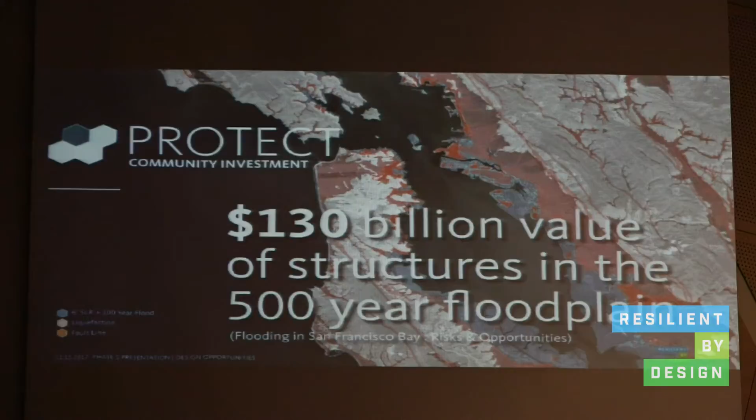So what does it really mean to design a lasting future for the Bay Area? We already know there's $130 billion of value of structures in the floodplain. How do we protect for that? There's 30% growth happening between 2010 and 2040 in the Bay Area. How do we think about the growth aspect?

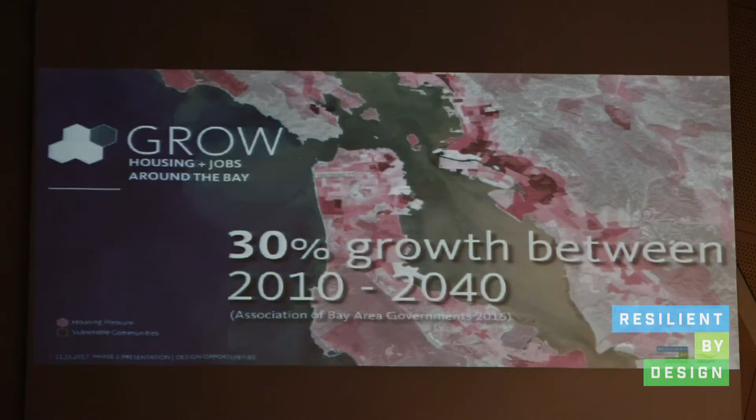When we think about trans-Bay corridors, studies suggest there's 152% capacity in 2040. How do we think about moving goods and people? And then there's really only 20% of the Bay shoreline that's accessible. How do we engage that?

Each of these systems doesn't run independently, and when we think about resilience, we want to make sure we think about all these four things together.

Given the complexity and gravity of this challenge, our team approached the research phase eager to listen and learn from the regional experts, the resilience experts, and the community leaders to find out what they had to teach us about resilience.

Looking back at the last 10 weeks or so of our process, it wasn't surprising to realize that our most vital insights came from walking through neighborhoods and talking with community leaders, really being led by those who have dedicated their lives and careers to protecting communities in the Bay Area.

Besides our external outreach effort, our team also leaned heavily on our subject matter experts to conduct qualitative and quantitative research, synthesizing a wealth of information into design workshops we conducted internally as a team. Together, our external outreach and internal workshops gave us the insights we built on for the design concepts that Ricky and Cecil will be talking about in a few minutes.

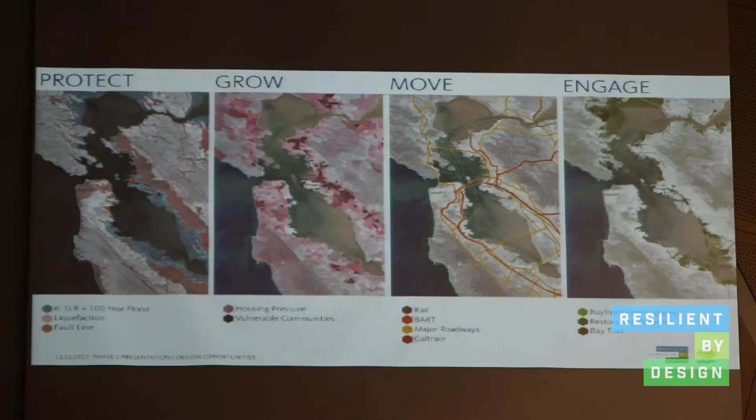Looking at all of the sites and all of the factors we took into account, from flooding to housing to mobility to ecology, we came back to 2 sites in particular, West Oakland and East Palo Alto, that really spoke to our team and presented the greatest opportunities for high-level regional impacts from very localized interventions. From this research, we were also able to tentatively identify our intervention area and begin designing the concepts that Ricky and Cecil will be walking through.

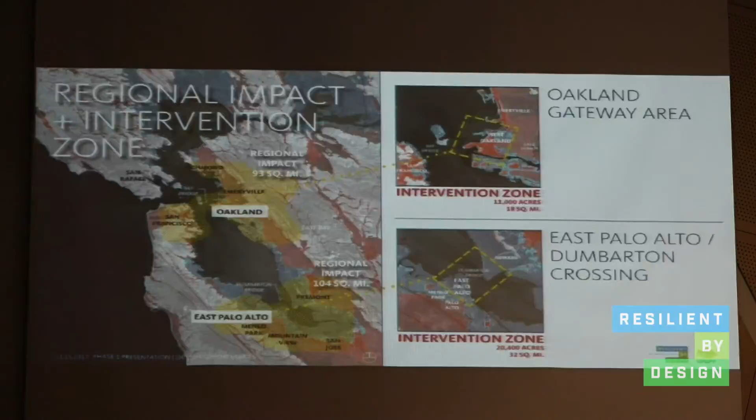So the first site we're going to be talking about is the Oakland Gateway area. What's really interesting about this area is it's very rich in many ways, with all this infrastructure - it's a real 3-dimensional equation and solution where there's so many different factors that come together.

One of the most important things about it is that Oakland already has this kind of vibrant character, its color, its richness to it. So making sure that we actually understand what that is and work with that as a basic framework is really important.

But again, with that, how do we create new experiences on top of that? And how do we connect these experiences together? And how do we work with the community to really figure that out?

So when we're balancing opportunities here, it's really about thinking about environmental justice, gentrification, and displacement in many cases. Can we actually build something adjacent to, for example, West Oakland, to increase opportunity, but also create something that benefits the community adjacent to it as well? And is there a way to manage displacement with that?

And then is there a way of really thinking about how do we address the risk of sea level rise and flooding in so many different ways and different typologies?

So in terms of the constraints, again, sea level rise, we need to figure out what we do. There's actually 2 vulnerabilities in that area. What do we do with the East Bay MUD and the wastewater treatment plant? And how do we think about some of the investments that are actually in the liquefaction zones?

We're thinking about growing the community because of growth. If we think about displacement, affordability of housing, gentrification, what do we do with that? Are there ways of preparing for this 30% rise in jobs and housing needs?

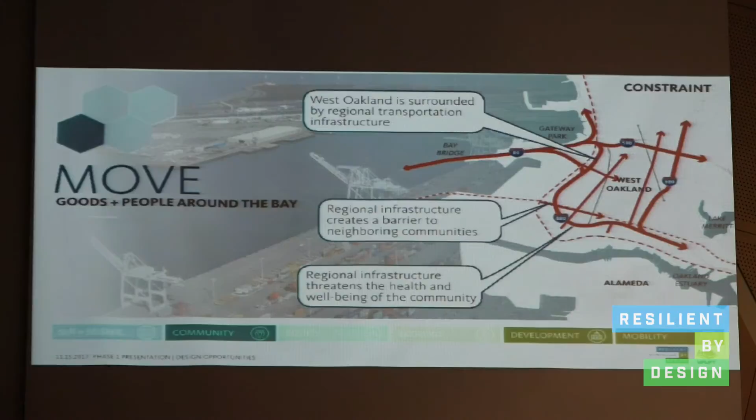And again, with mobility and infrastructure, are there ways of thinking about it from a health and wellness perspective? And if we want to engage, how do you actually get a community to connect back to the bay? We have an operating port, there's all this rail infrastructure, but what are the ways that we do that?

And then sometimes, in many cases, here with Oakland and Alameda, the estuary kind of divides up those communities. So how can we connect those things together?

So the first design opportunity and concept that we talk about is bridging communities through uplift. The first thing we do is protect the edges, Gateway Park, also down on the southern side where the estuary is. In terms of growing, there's opportunities of creating and utilizing the underutilized rail areas to be able to create a deck and a community above that.

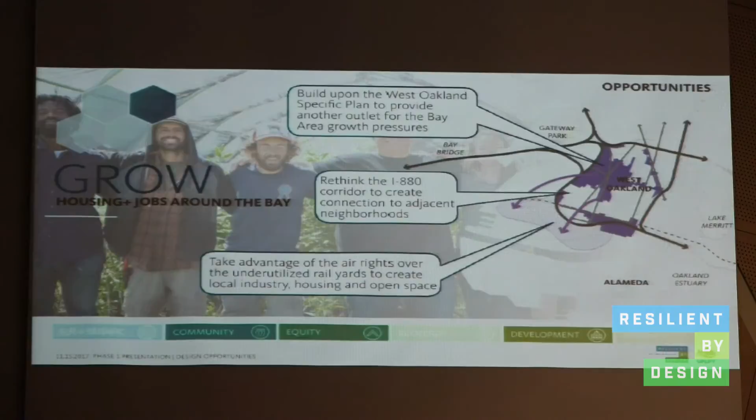There's also opportunities to ease some of that growth pressure as well.

In terms of moving, can we actually rethink the I-880 corridor and see what we can do with that? Can we also reorganize some of the port logistics? Remember, all the pollution, the air pollution, all of those things are coming from there - how do we mitigate some of that so there's some advantages for the community?

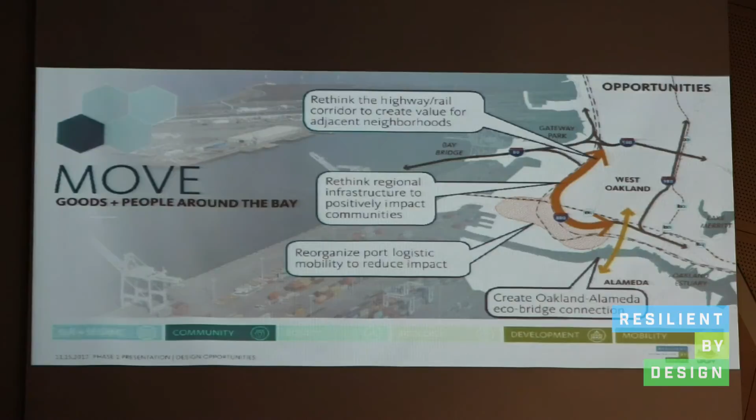And then is there a way to create this kind of eco-connection between Alameda and Oakland? In terms of engaging, if we create this new deck above the railway, is there a way of creating this new connection, bringing green and water closer to West Oakland, but also being able to get closer to the water from West Oakland as well? And then is there a way of creating that connection to Oakland?

So the strategies here are kind of a synthesis in terms of our concepts of what we're thinking of doing.

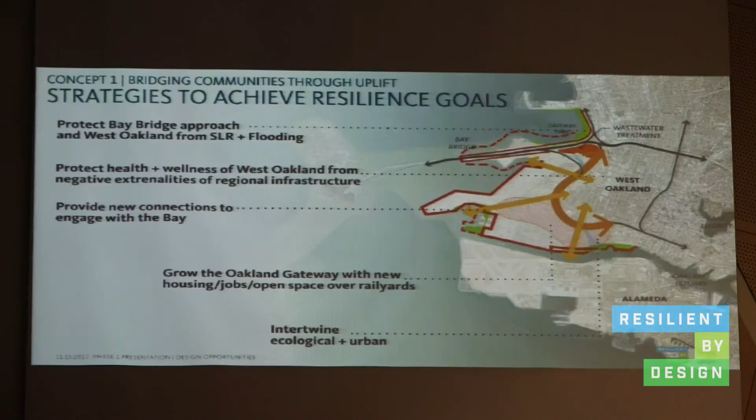It's really, again, thinking about how do we intertwine the ecological and urban conditions, so it's not isolated, but how do we use that to our advantage? We do that in order to be able to protect, grow, engage, and move people.

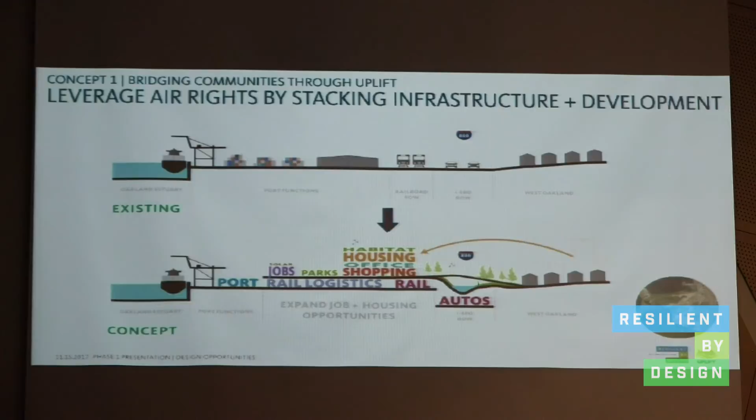So this is thinking about things three-dimensionally. You see the existing condition at the top, and a section at the bottom. The section shows how you can have a dialogue between West Oakland and this new community in terms of new opportunities for managed development. You can see the rail logistics below, and new opportunities for habitat, job growth, and new parks as well.

This is a conceptual image of what we want to say. We want to really connect some of these communities to the Bay, but really thinking about the operational aspects. The port needs to operate, but through clever ways of using design and working with the community, we'll be able to make these connections that allow for new opportunities: new jobs, new housing, farmers market, opportunities for sports, constructed wetlands — really speaking to the culture and diversity of this new place.

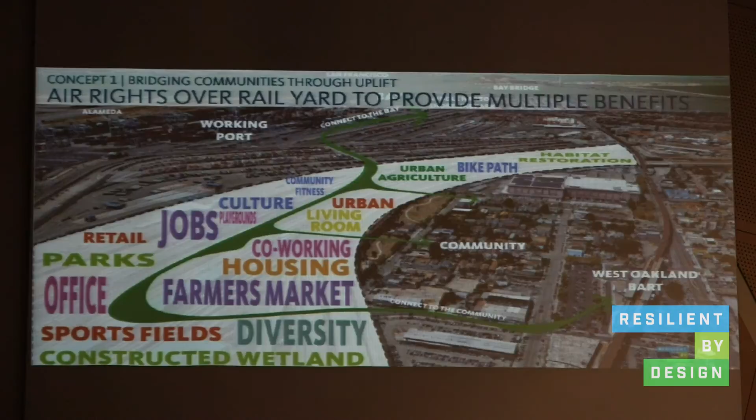We found the challenges and opportunities in this area so compelling and complex that we developed another concept for it, using some of the moves shown in our previous concept, but really shifting our focus towards bringing water in and using it to connect communities from Gateway Park to Alameda.

Our concept reimagines the regional infrastructure, which has disproportionately negatively impacted West Oakland, and in particular the wastewater treatment plant, which will become increasingly vulnerable with sea level rise, more severe rain events, and increasing populations.

While sea level rise protection will happen primarily along the shoreline with both hard and soft protective infrastructure, we saw an opportunity to use the 880 right-of-way to address current and impending issues by transforming the spaces under and adjacent to the highway with a green, spongy corridor. We can treat wastewater with wetlands, provide habitat and open space, provide a green buffer for highway air pollution, provide land that acts as a sponge during flooding events, and create a new and protected bay trail.

The corridor would link Gateway Park through West Oakland and down to Alameda, where we're proposing a new bridge to connect West Alameda to Oakland, providing a critical missing link. The right-of-way actually closely aligns with the historic shoreline, and by transforming this land, we're reconnecting two parts of the bay that were historically tied together.

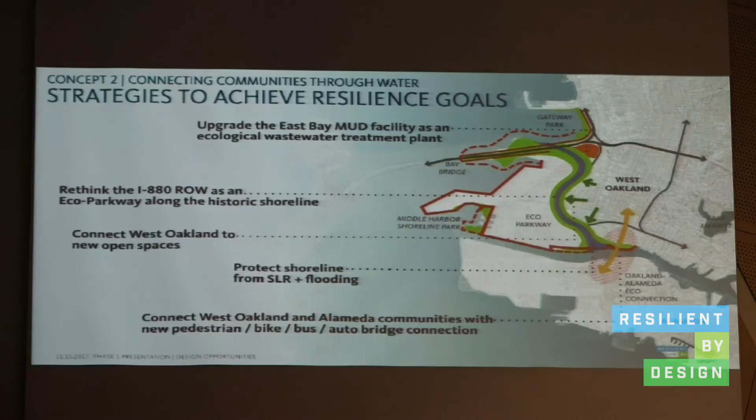In an area so cut off from the bay, we think it's critical to provide more ways and spaces of engaging with the bay, and to use water as cultural placemaking — understanding that resiliency is not just about flood protection, but also about creating social cohesion. This likens to cities with canal networks. The canals were often built to control for flooding, but over time have become iconic elements of the city, and we see that creating a sense of place strengthens community.

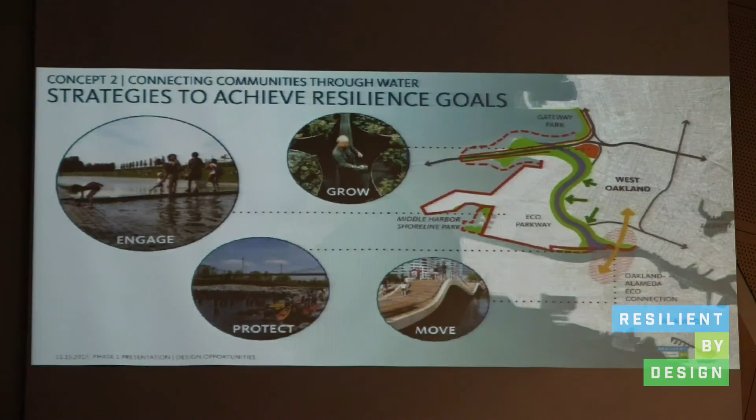At the southern end of our site, the Oakland estuary currently forms a barrier between Oakland and Alameda. By bridging the estuary, we can connect communities, activate both sides of the estuary, and provide more access to the water and an evacuation route during disasters. By reconfiguring the existing transportation arteries, including undergrounding the rail, we can create space for development, improve air quality, and reduce neighborhood traffic.

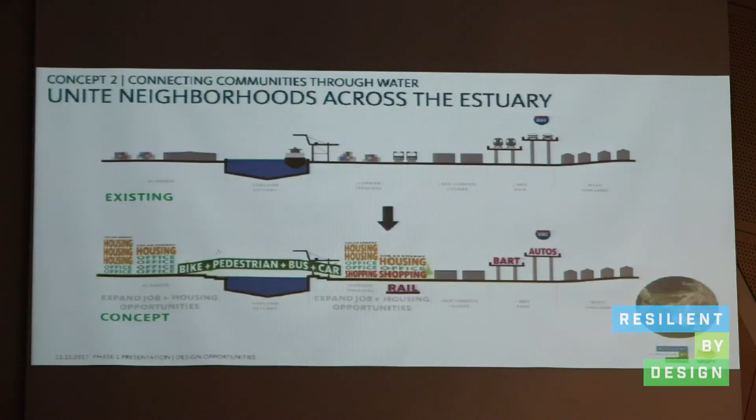Further north towards the Bay Bridge, existing conditions show the breadth of land devoted to the rail and 880 corridor. Our concept transforms this land into a blue-green corridor, and while we likely won't be able to absorb all 63 million gallons of water currently treated by the wastewater plant daily, a series of constructed wetlands within the corridor could treat some of that wastewater, allowing for infiltration and improved water quality discharge to the bay.

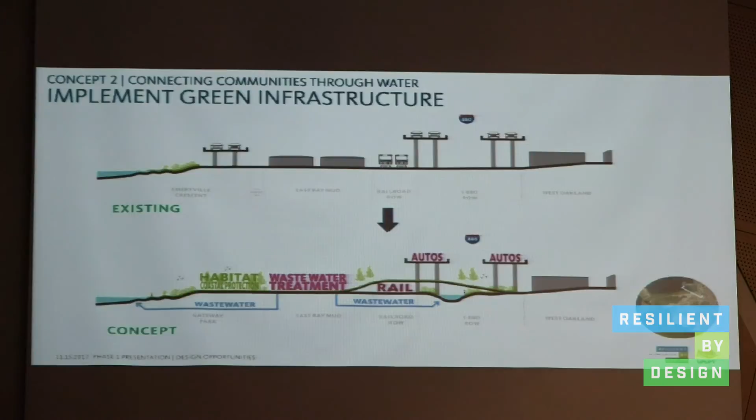We also see that those wetlands could act as habitat, providing a missing link between the Emeryville Crescent Marsh and down to the Oakland Estuary and San Leandro Marsh. Adjacent uses could include recreation areas and other floodable programs so that during storm events, there's more land to absorb water.

The anchor of our blue-green corridor is the bridge to Alameda, which will integrate mixed-use development so that people can work where they live, enhance the park system and transportation network through dedicated bus lanes, bike lanes, and open space, reduce traffic and commute times by providing a more direct route to the East Bay, and most importantly, connect two communities, creating a stronger, more resilient Oakland and Alameda.

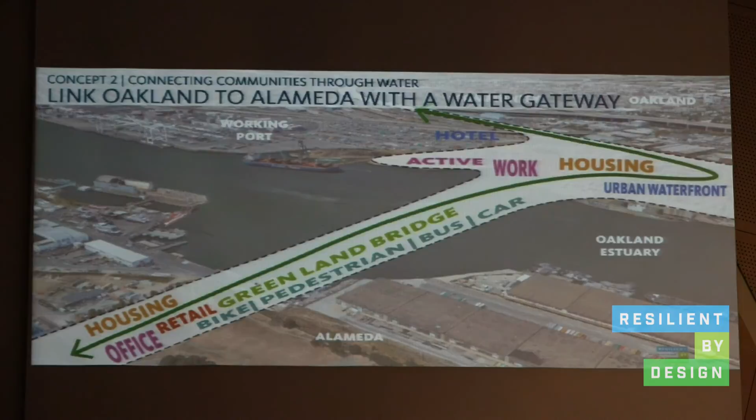So the third site that we're going to be talking about is the East Palo Alto and the Dumbarton Bridge crossing area. There's really some complicated regulatory aspects down there. In terms of growth, we need to think about how cities evolve in the future, so we're looking more long-term, the 2050 aspects.

East Palo Alto has amazing character and richness, so how do we keep that as a foundation while introducing new experiences? It's about how do you actually build on the bay and still maintain some of that ecological aspect, doing an intervention that may not have much impact on the bay but will improve other aspects. We need to protect some of the edges.

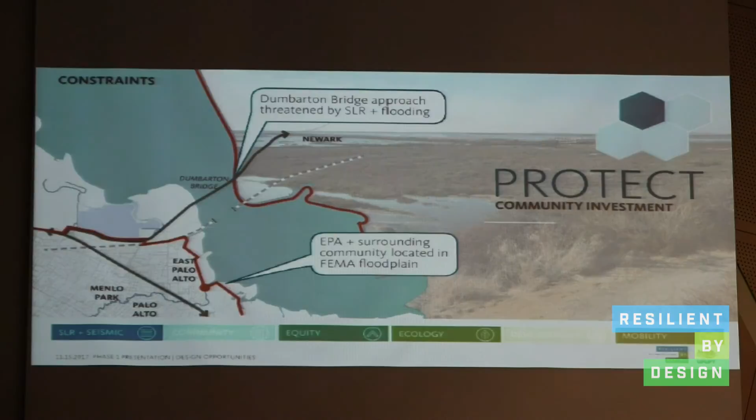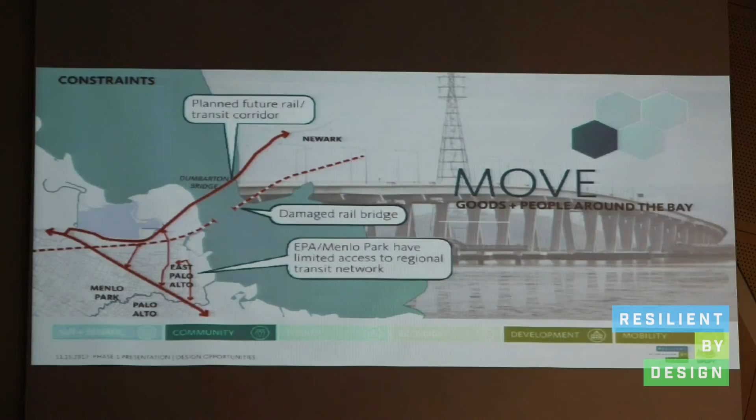Thinking about growth in those three communities, East Palo Alto and Menlo Park, think about affordability. How do we move the Dumbarton Bridge itself and the rail corridor, and begin to connect those things together? How do we engage with the water so that it actually becomes a destination as well? So the third one we call habitat opportunities above and below.

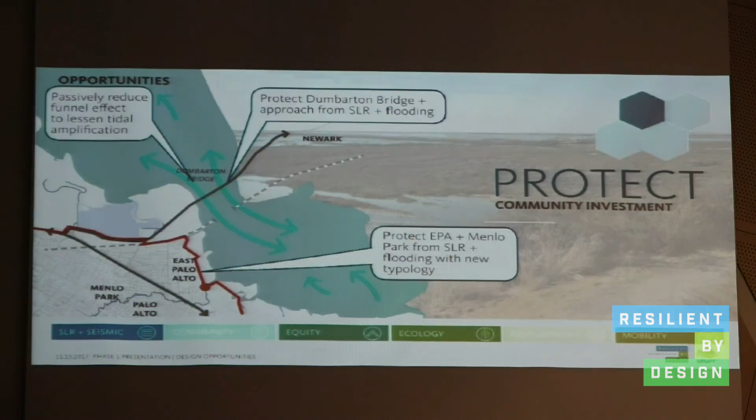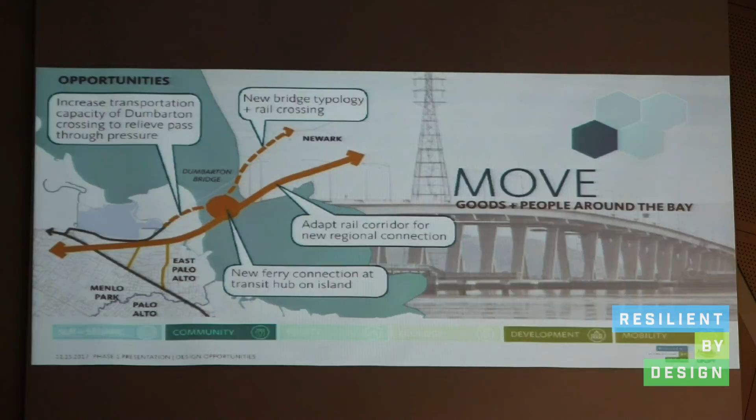So we're protecting the edges of EPA from sea level rise and flooding with a new typology. Is there a way to improve jobs and housing by thinking about the opportunity by the water, thinking about transportation in terms of new ferry connections, and a multifaceted bridge system that begins to tie together all these different modes of transportation.

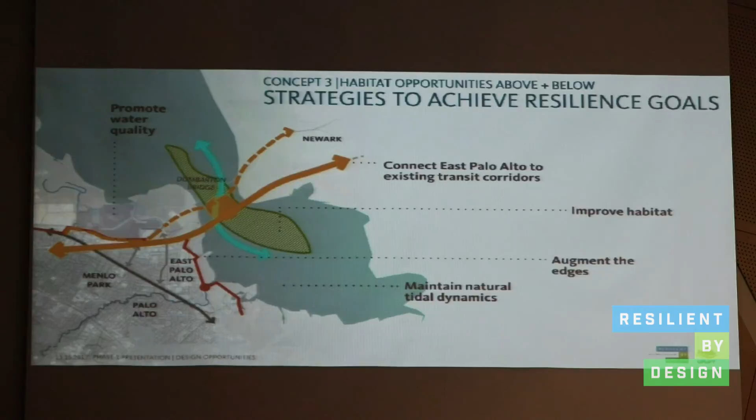How do we engage in this opportunity zone, is there a way of creating a habitable intervention on the bay? These are some of the strategies we're thinking about that need to all come together in terms of being able to move, protect, engage, and grow this area.

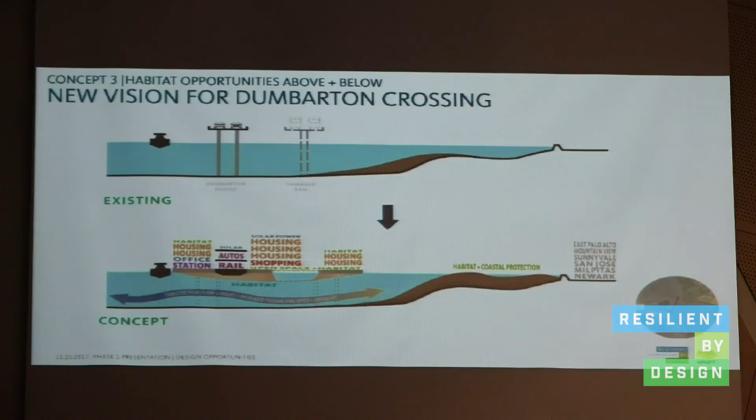So here's a section showing that kind of intervention that is actually on the bay. We're thinking about how do you get back to some of the natural tidal flows, but is there something we can create that can really think about managed displacement and other opportunities for habitat and housing. We call this one, conceptually, the bay as home and as destination, as opposed to the bay just being a thoroughfare.

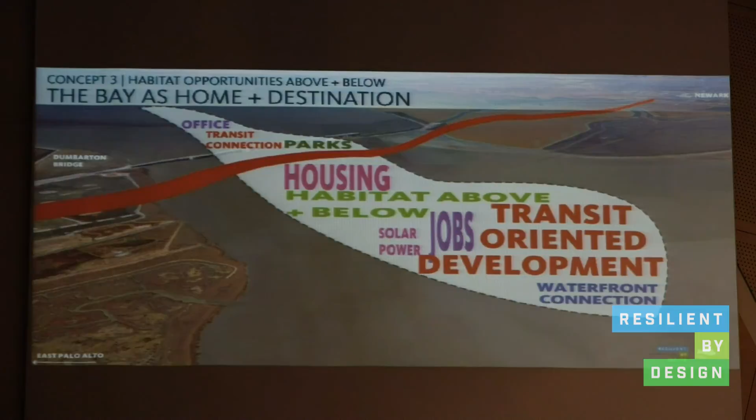As you heard earlier from Ricky, the economic lens played a very important role, not just in identifying the sites and the interventions in terms of where they will go, but choosing the areas where they'll have the greatest impact, communities around them which have been the most stressed in the Bay Area.

It also plays a really important role in our thinking around the types of interventions that will have the greatest long-lasting impacts. I think all of these interventions unlock tremendous economic value for the region, as well as for the communities around them.

I think the test of these strategies is going to be how we can capture that value and deploy it in a manner that doesn't just flow back to the infrastructure itself, but has long-lasting impacts in the community. That's going to be a critical piece of our thinking as we develop these solutions, so that these impacts stay in the community and the communities have the greatest benefit.

West Oakland and East Palo Alto are caught between two surges: rising sea level and rising housing prices. Community members legitimately fear that design solutions that help them become more resilient to climate change will exacerbate gentrification and squeeze them out. We recognize that listening is going to be even more important in this next phase of the challenge.